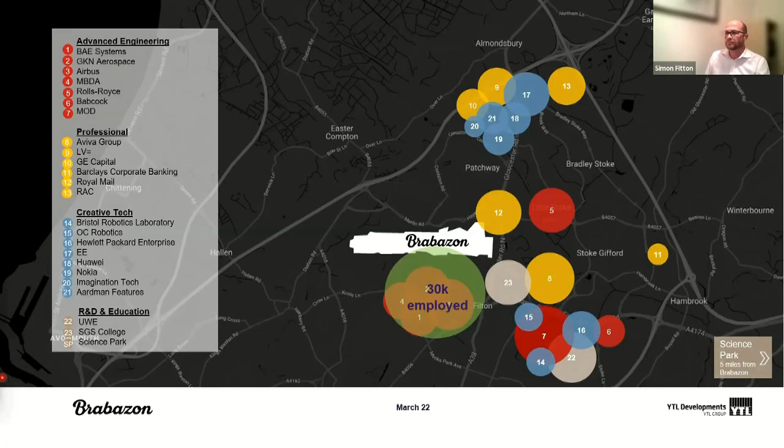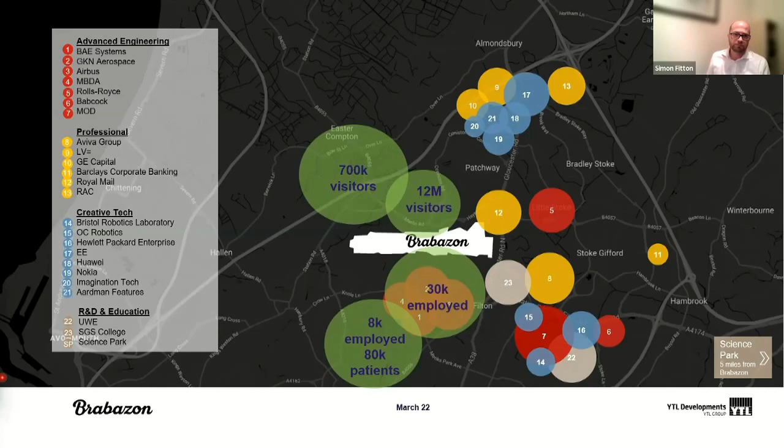It's a huge employment area in its own right. 30,000 people employed at the BAE and Airbus employment area. Southmead Hospital is just down the road. The Mall, with 12 million visitors, and this real emergence of Junction 17 as a leisure hub. That's going to be fostered by the Wild Place and Bristol Zoo moving up to Wild Place over the next couple of years, with up to some 700,000 visitors a year. And there's things like the Wave just to the north, with ever growing popularity. Then back to employment, Aztec West and the Almondsbury Business Park, the Bristol Business Park and UWE, and the MOD along the ring road there.

So Brabazon is very much at the heart of all of that. We don't see it as suburbia. We see it as a location that is very much capable of delivering high density development, and that's what we intend to do.

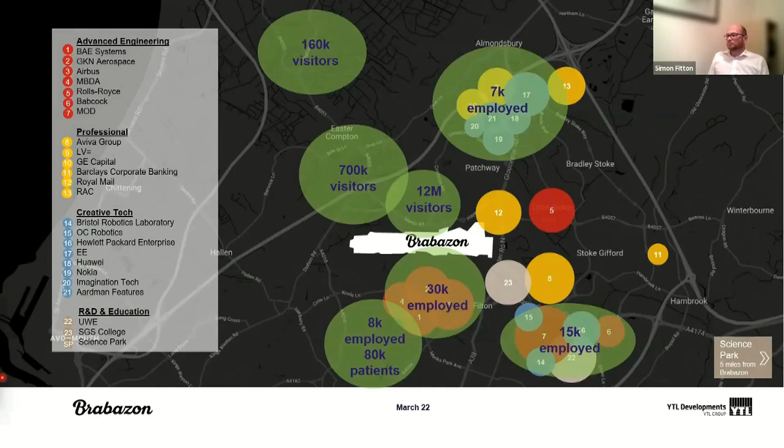Historically it's actually created quite a divide in this particular part of the North Fringe. It's very hard—you absolutely have to get around the site rather than across it. So we've got lots of opportunity over the next couple of years to really open it up and get movement across it for the first time in a long time.

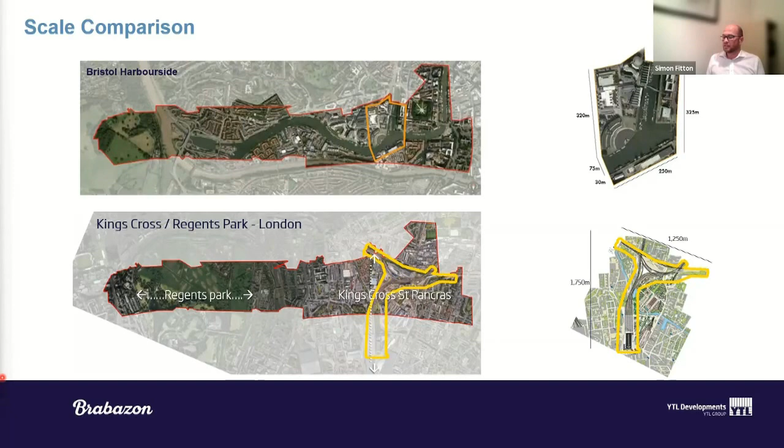Moving on to the next part of the presentation, exactly what is coming forward in the next 2 to 3 years. And I guess the main one to start with is, of course, the arena. We secured consent for the arena only last year, albeit it was reported and approved at committee in 2020, just before lockdown.

Where are we at with it? We are on course to open the arena in 2024, probably towards the end of 2024, in truth. That planning permission has over 60 conditions attached to it, a lot of them pretty complex, working around the transport strategy that we've now got to resolve in detail over the course of this year. Demolition will be starting in the summer, so there's a lot of external outbuildings that need to come down. We've got to strip out the internal parts of the hangars, and then construction proper will start in the autumn. So there's a 2-year build program from there on.

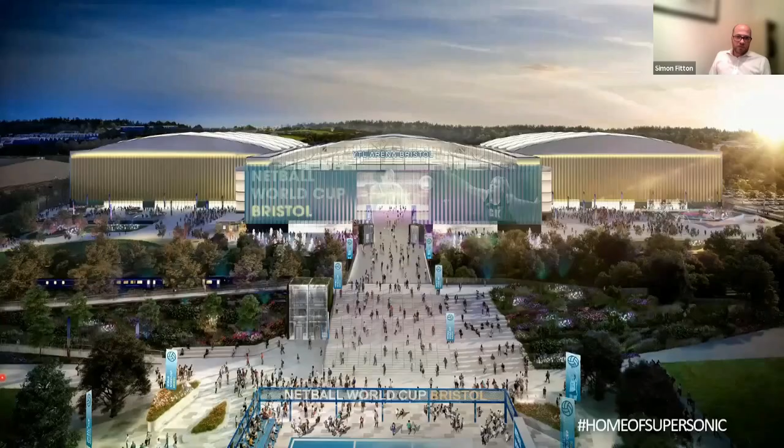So what is it? You all know this, I'm sure, but it's more than just an arena. The arena is just in that central hangar, and if you're not entirely sure where the hangars are, I'll point them out in a moment. The arena is the central hangar, 17,000 capacity at its full extent.

At the east and west hangars - on the east we have what we call Festival Hall, which is going to be a big exhibition space. On the west is the west hangar, which is a bit of a work in progress, if I'm honest. We've got a sort of multi-use consent for that hub.

Lots of ideas coming forward for what it can do, but in some ways it's constrained by the arena use, because there are huge security issues associated with the arena. There's only one access to it, the bridge over the railway line from the airfield. So whatever goes on in there has to relate to the arena, but I'll show you some of the visionary images for it.

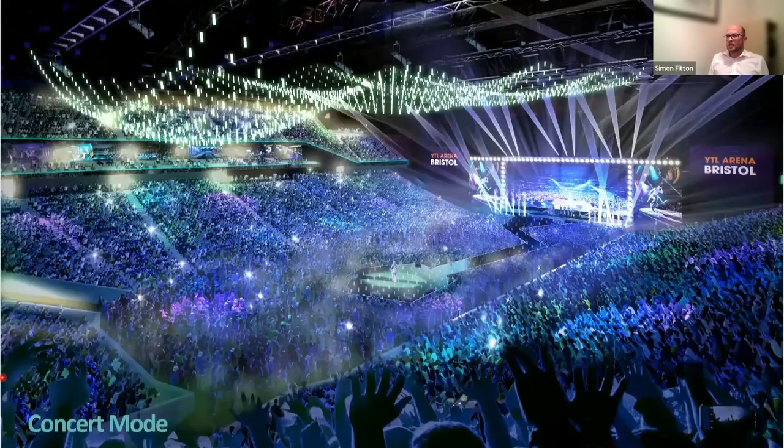Just flicking through what the arena kind of looks like - that's it in full 17,000 capacity mode, with the stage at the back. You'll walk in from the airfield on the left-hand side of the image, so the stage is always accessed from the rear of the hangars. That's it in full concert mode.

And this is called sport mode, so you've seen pretty much like the O2 where they have all the tennis tournaments. That's almost looking at it from the stage side.

And then we've got this in-the-round mode, where you might have boxing, for example. What you see towards the back is where the stage normally is - that's all kind of retractable. We can replace it with temporary seating there to create an amazing atmosphere.

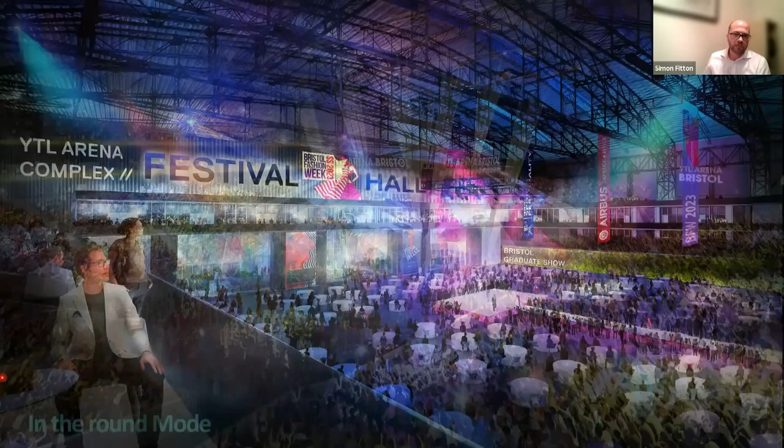So this is what Festival Hall might look like, a big exhibition space. If I'm brutally honest, that 2024 opening date really is related to the arena itself, the central hangar - it's all hands on deck to deliver that in time. So probably both the east and west hangars will follow on after that, but hopefully hotly in pursuit. That's the east hangar.

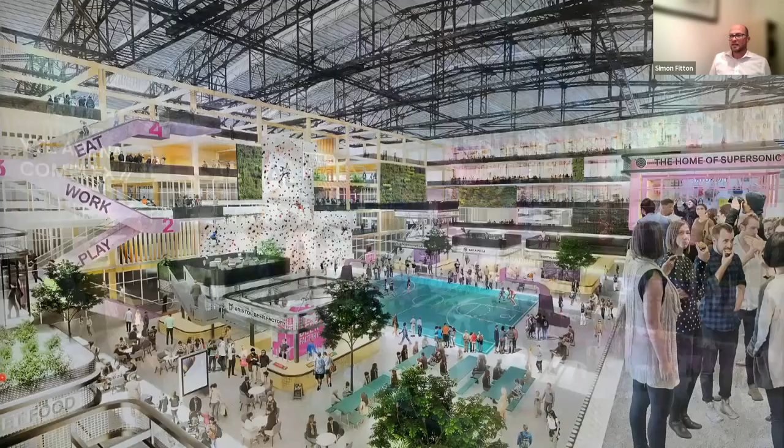And this is a sort of vision for the West Hangar, which is exactly that multi-use, multi-hub type space - restaurants, co-working. Lots of opportunities that we're exploring for what it could be in time. Very exciting, very ambitious plans, but yeah, delivery.

There is a dedicated arena team within YTL, but I'm working with them on that condition discharge information, because a lot of it then relates back to what's going on the airfield.

So that's the arena. Moving on to the airfield itself - what's happening on site right now, which you can see if you drive by, is delivery of our phase 1 residential scheme, which we've called the Hangar District. That's a CGI prepared a few years ago of how we envisioned the Hangar District.

We've got reserved matters consent for 302 units, well underway with construction now. We've got about 50 completions, probably about 40 occupations. The first household moving in was June last year, I think. So it's emerging out of the ground.

Just to show whether we're true to our word in terms of taking the vision for what it should look like to what it actually looked like on the ground - this is a drone shot from summer last year, where you can really see that crescent shape starting to take shape. Two blocks of flats in the north of the image there.

That's the one major listed building on site, called Hangar 16U. That's associated with the other hangars that exist within the Aerospace Museum complex just to the right here. This is Hayes Way running across the top of the image, and the Ford garage there - so there it is from a drone shot.

That listed hangar is very important to this first phase of residential development. We're looking to actually bring it forward sooner rather than later as a community use - it kind of lends itself quite well to a community building.

We've got an existing Section 106 requirement for a multi-use community building, including a library and GP surgery. Hoping that we can bring forward that very soon, which is quite unusual for a development of this nature - the 106 doesn't actually require this building until 2,500 homes are built across CPNN, Cribbs Patchway New Neighbourhood as a whole. So it's testament to YTL's way of doing things slightly differently.

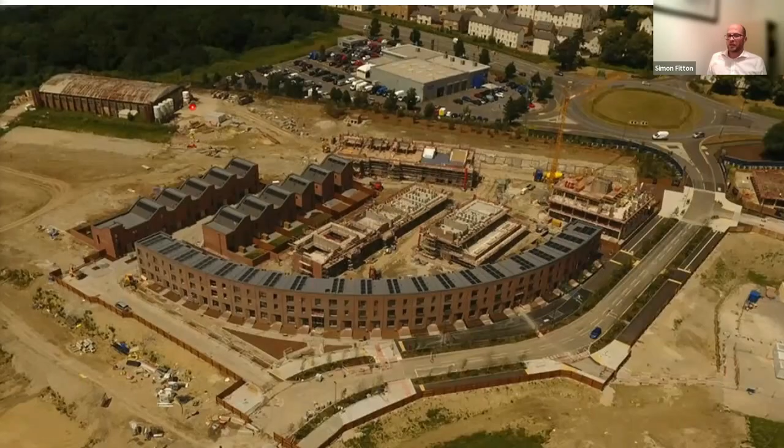And what does that look like on the ground? Again, trying to do things differently - we've got an awful lot of homes to build, but we don't really see ourselves as a volume house builder. Everything that we do is bespoke to the Brabazon scheme.

You can see there our completed first row of houses that have that nod to the aerospace, with that sort of wingtip design to the roofscape. That's partly the nod to the heritage, but also, as you can imagine, all those units' roofs are at least south facing to capture solar gain. All the properties have solar panels. On the left, we've got a lot of properties with double height ceilings, creating a really impressive living space.

That's the end of that crescent shape that you saw earlier. Again, emphasis on high quality bricks, some nice detailing there at the tops and through the entrances to the main front doors.

That's our sales complex on the right hand side, so you are very welcome to pop along and have a look at the show home. You can see our advanced landscaping, and everything is done with a purpose.

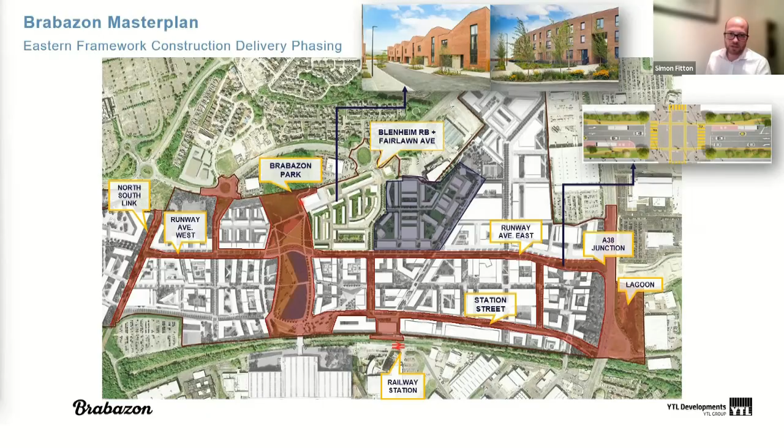So what do some of those bits of infrastructure look like? Well, not the most exciting one, but important, which is the new A38 junction. This is going to be our principal new access from the A38. I'll show you this, the sort of Google map on the right hand side of the image, because that's where the Metro bus will be coming.

You'll have seen all those works to Gypsy Patch Lane and the bridge going in. The new Metro bus route will come through Gypsy Patch Lane, under the bridge, and then through the Horizon 38 development, and then run straight across the A38 into Brabazon. So straight across here. Big old junction that - it's a heavily signalised junction, multi movement: left, right, straight across.

So that work will begin - work has effectively begun on it already, but in earnest next month. So we hate to say, a fair bit of disruption on the A38 there through the course of this year, but it's vital we deliver that, because we've got to deliver that Metro bus route so that it's operational by this time next year. So Metro bus running through the site by March next year.

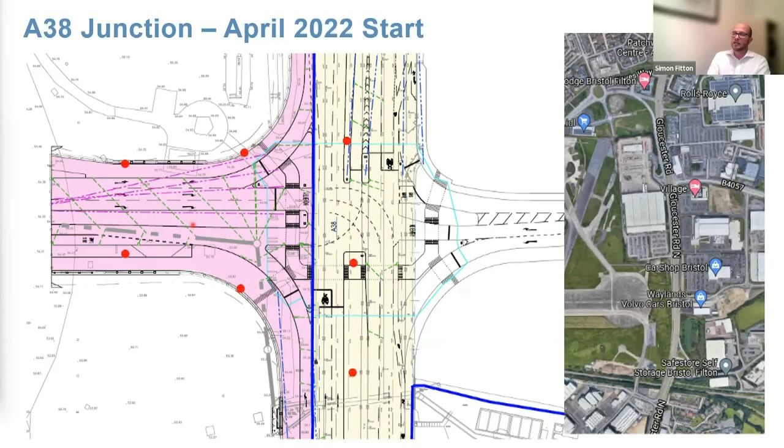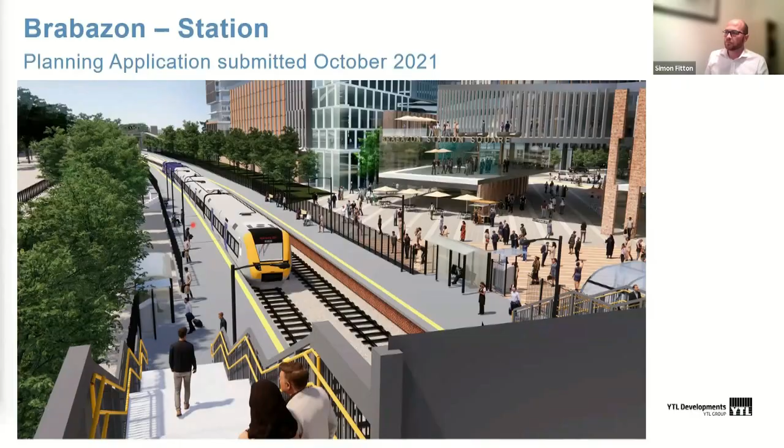But essentially, it's a very simple application right now. It's just the platforms and the bridge. But the bridge itself is quite a funky bridge, if you like. It's called a Futura bridge - it's a prototype from the National Composite Centre. So very excited to be delivering a new bridge for what is called North Filton Station, but hopefully in time will become known as Brabazon. You can see the hangars in the background there, the arena. So not too far to walk from the station to the arena.

Then Brabazon Park. Again, really unusual, I tend to think, but we want to deliver this park by 2024. We have submitted reserved matters under the existing outline just before Christmas. The image on your right there is that reserved matters submission. Very exciting - it is, we believe, the largest park to be built in the southwest since Castle Park post-war. Huge undertaking. A lot of thought has gone into the design, but again, quite unusual for a developer to be delivering open space of this scale quite so early in the evolution of the scheme.

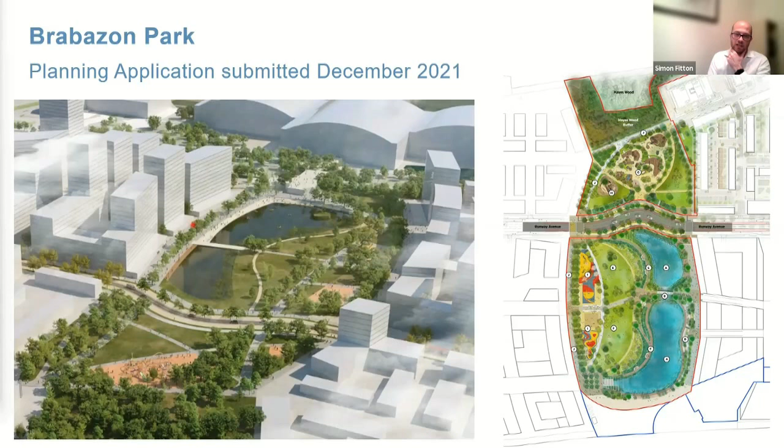But very exciting nonetheless. Big focus on not just green infrastructure, but blue infrastructure in the shape of that lake. That is a permanent lake. It does serve as a drainage feature, but it's a permanent water body.

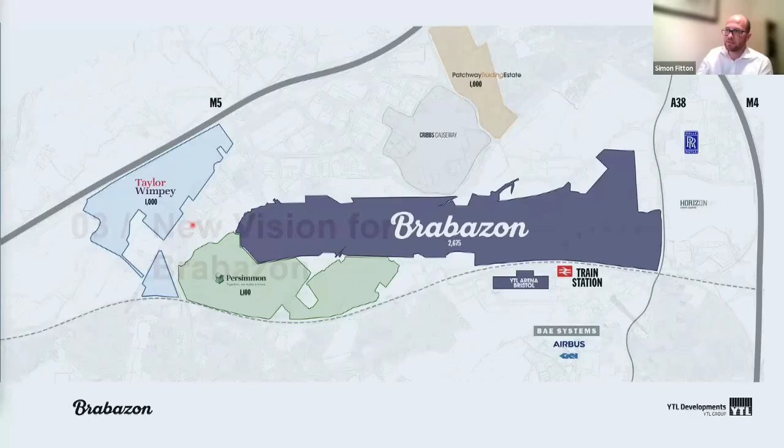So a lot going on site over the next 2 to 3 years, and a lot of that is wrapped around our new vision. So a lot happening, but then a lot of change on the horizon too. Before I talk to you about how that vision is shaping up, it's quite important to reflect on the existing context. As we probably all know, the Brabazon site forms part of the Cribbs Patchway new neighbourhood.

That's allocated in the South Glos core strategy for 5,700 homes, of which we've got consent for just over 2,500. Persimmon control Fishpool Hill - they've got consent for 1,100 homes - and Taylor Wimpey and Bellway own the land opposite Dick Lovett. It's called Haw Wood, and if you've ever driven by recently, a lot of work's going on there, and they've got consent for 1,000 homes.

So when you add it all together, there's consent for just over 4,700. So there's this missing 1,000 homes from the allocation. And when the allocation was made, South Gloucestershire thought that that 1,000 homes could come forward at the Patchway Trading Estate. This is back 10 years ago now.

Of course, the Patchway Trading Estate continues to be quite a prosperous estate. Our offices are located on it, and really there's no prospect of those 1,000 homes coming forward anytime soon. So what we think we can do is to take those 1,000 homes and integrate them at Brabazon.

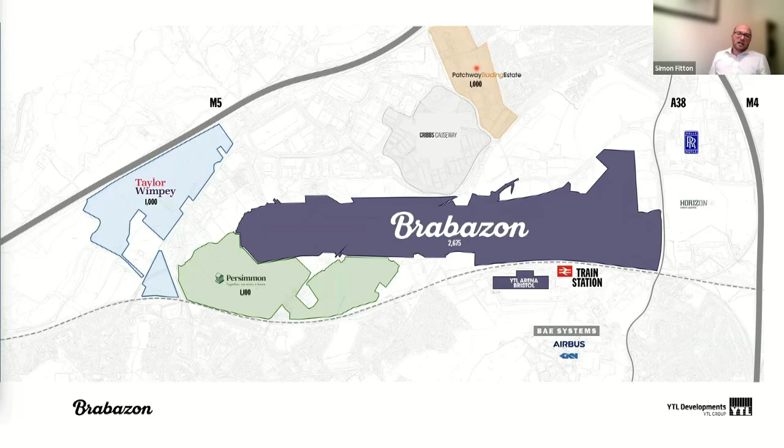That is probably a good 15 years worth of development at Brabazon. This is a very long-term development for YTL, probably taking over 25 years in truth. So don't worry, dare I say, in effect, because there's a problem only in about 15 years' time. And we do have a solution for how to resolve that problem, which I'll come on to.

So, again, before I come on to it, it's important to say, well, hang on a minute, YTL, you only secured consent back in 2018 for 2,500. Now you want to come forward with 6,500 homes and a huge number of increase in jobs. What's changed? Well, quite a lot, actually, in those 3 years.

The big one is the arena. We've already had to change the master plan quite significantly to accommodate it, just in terms of the transport strategy. I'll flick onto the next slide very quickly, but that is our emerging strategy for the arena. It's hugely complex. We're sorting out all these conditions through the course of this year.

We've got to accommodate 1,500 car park spaces across 3 multi-storey car parks. When you think about it, 1,500 car park spaces for a 17,000 capacity arena, the vast majority of people are going to be coming by public transport. So by rail, Metrobus, shuttle bus from the city centre, park and ride locations, local buses, cycling, you name it. We've got to integrate that parking strategy into the master plan.

And it's a hugely complex thing to do. So we've had to rethink things anyway. We already have done that. But of course, the arena presents a huge commercial opportunity too. Like I said, those 17,000 people are all going to have to come through the airfields to access the arena. So huge opportunity there for us to turn what is a fairly inward-looking site into a real destination, and that changes things markedly.

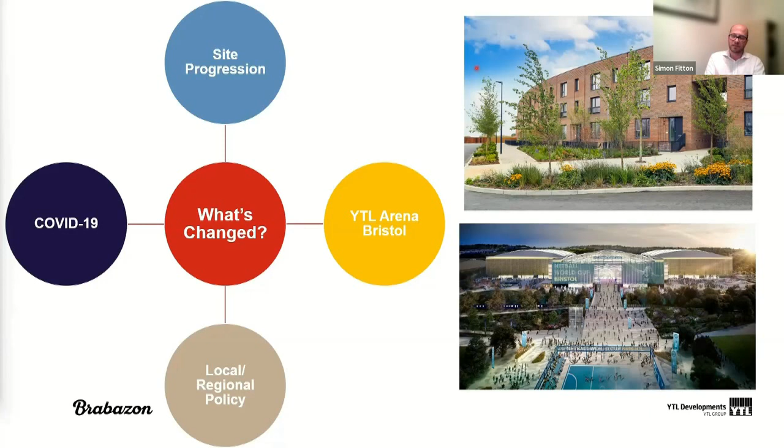So that's enough of the lead up. The next slide is an illustration of how we think that vision starts to shape up.

The master plan will deliver exactly what it's already got consent for, which is 3 new schools, 2 primary, 1 secondary, 6,500 homes with higher density development and more commercial floor space, further uses in terms of further education. We think we can deliver up to 10,000 new jobs, loads of community facilities, all enshrined within this concept of a 15-minute neighbourhood.

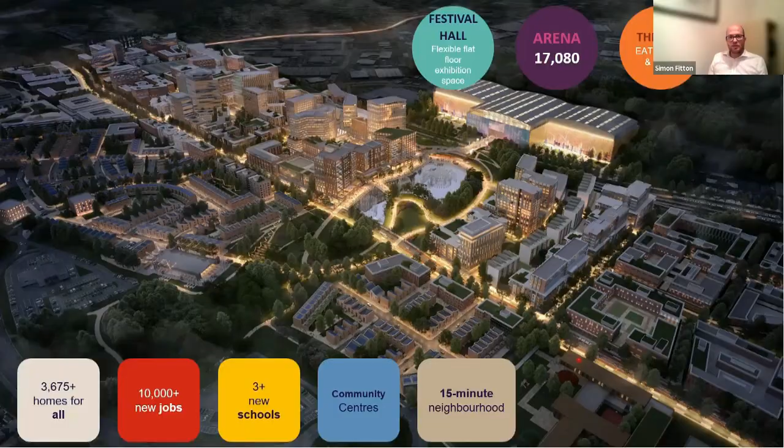A lot of the arena pedestrians will be funneled through the park. You can see where we're coming from in terms of the commercial offering. Lots of active ground floor uses, the lake there.

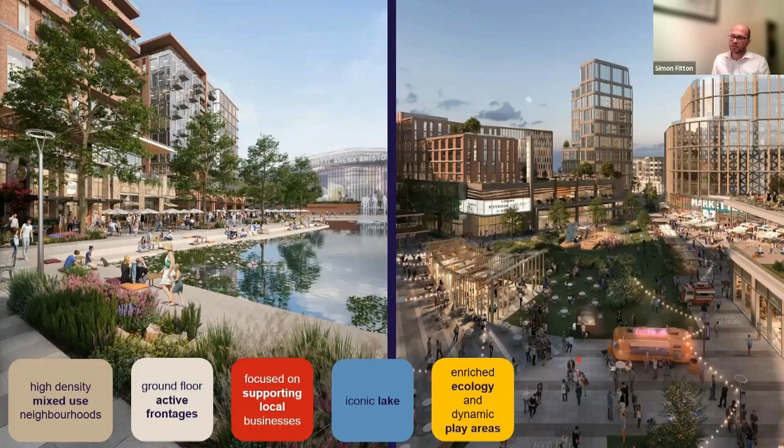Transport is the key of everything we do at Brabazon. Huge areas of segregated cycle routes, pedestrian routes, a lot of them completely free of the car.

So pedestrian, and a bit like the Ramblas in Barcelona, we liken it to. But it's a hugely important part of our strategy, and it's how we will deliver that maximum number of homes. Again, on the right, that's another view of the entrance into our City Green.

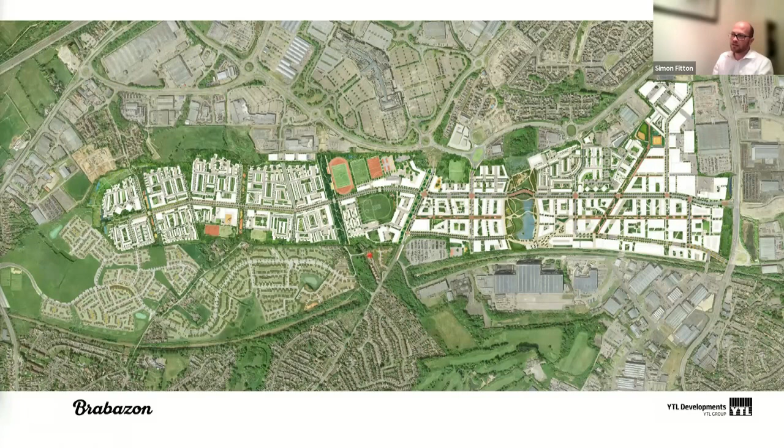So that's how it's starting to come together. But the obvious question is, goodness me, it's bad enough on the A38, it's bad enough at the motorway junctions. How on earth are we going to get this uplift in development?

Well, we've got a phased approach, and it's across these 4 phases that we talk about. Phase 1 is what I spoke about earlier, the consented level of development that really already has that mitigation strategy evolved for it. Rail station, Metrobus, all the other mitigation that we're contributing towards.

How do we get beyond that? Well, truth be told, if we introduce more vehicle trips onto the network, then very quickly it does get to a point where congestion is rife, and we can't really demonstrate how it's going to work.

The only way that it does work is through modal shift onto public transport. A lot of local people think that might be a bit pie in the sky, thinking how do you get people onto public transport. Well, we say in return, if we can't make it work with Brabazon, as connected as it is, where can we? In many respects, it's not that much of a leap.

To get to what we call transport phase 2, which is an additional 1,000 homes and further commercial floor space, it doesn't really require very much. When that rail station opens next year, there's only going to be 1 service an hour. We only need it to get to 2 or 3 to get onto our next phase. That can only really come through with more development. With that critical mass of population, it's reasonable to anticipate we can get that service upgrade - exactly the same with the Metrobus. So it's not a huge leap to get from phase 1 to phase 2.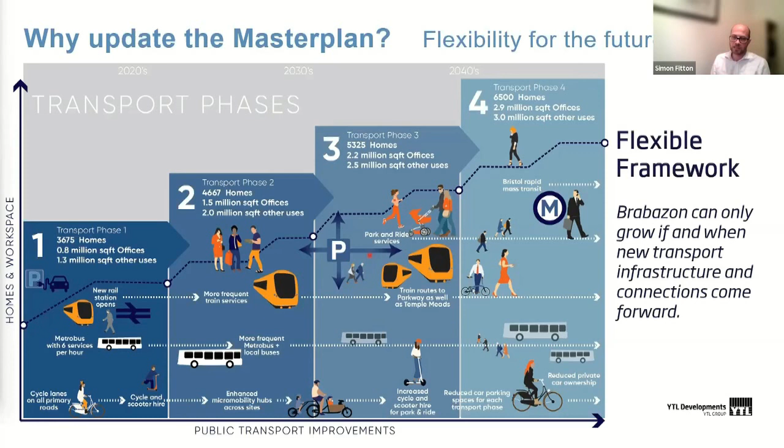So yeah, it's a complex strategy, big transport assessment coming in with the application next week. I'm conscious of time, but that is central to our philosophy - why we're introducing all those pedestrian routes, all those Metrobus stops. Everything is centered around modal shift and getting people out of the car. That's how we're designing the properties. Parking standards will reduce over time.

We can't do that right now. That first phase of residential development has your standard 2 car parking spaces for each house. But over time, as the public transport improves, we can slowly reduce the parking. People buying a property on Brabazon have to buy into that concept of modal shift, that not all properties are going to have a car parking space. Through design, we need to deter people from parking on the street. So it's a complex strategy, but one that over time, over a 25-year period, we think is deliverable.

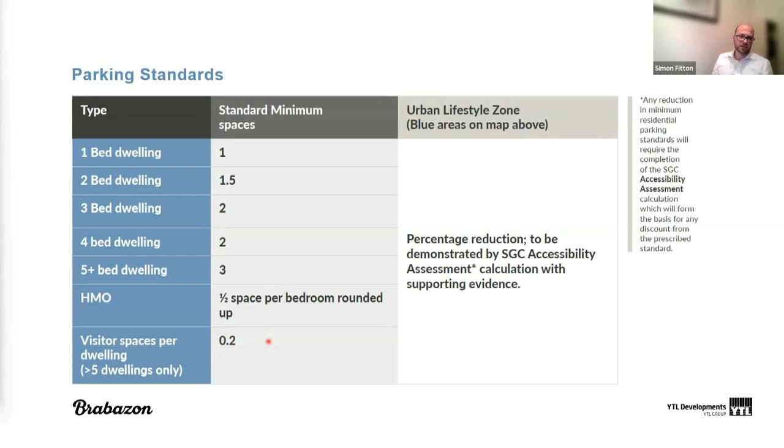And that is in line with South Gloucestershire's emerging policy position. So all quite complex, and I'm racing through because I'm conscious of time, but that is our promise: no additional trips onto the network than what we've already got consent for.

Just a little note on timeline. Like I said, we are submitting the new outline planning application next week, so keep an eye out for that. We've done an awful lot of pre-app work with the local community and the councils, so they know what's coming. Depending on how you look at it, it could be a relatively straightforward Section 106 agreement, because the way to look at it is we can't solve all these problems.

To deliver that number of homes and that amount of commercial floor space does need strategic levels of investment. We can't make that mass rapid transit happen - it needs central government funding. Everything that WECA is going to be doing over the next 5 to 10 years to try and make it happen, we need to ride off the back of it in essence.

But that's partly why we're coming forward with it now. We need to get that consent in place. We need, alongside WECA, South Glos and Bristol, to demonstrate that growth agenda to try and facilitate that ability to access those funds. In an ideal world, we'll have a consent by the end of the year. That's hugely ambitious - we know that.

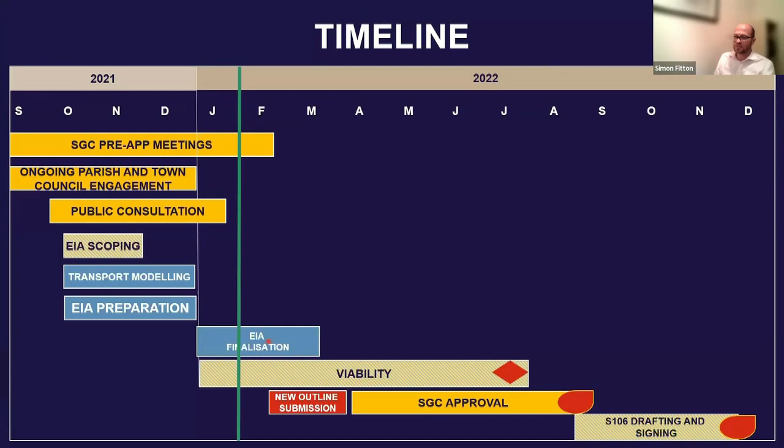We've got a planning performance agreement with the council, so time will tell. But I'm conscious of time—that takes me to the end of the presentation. I've kind of skated through that transport section, so if you have any queries on that or anything else, I'll be more than happy to address them.